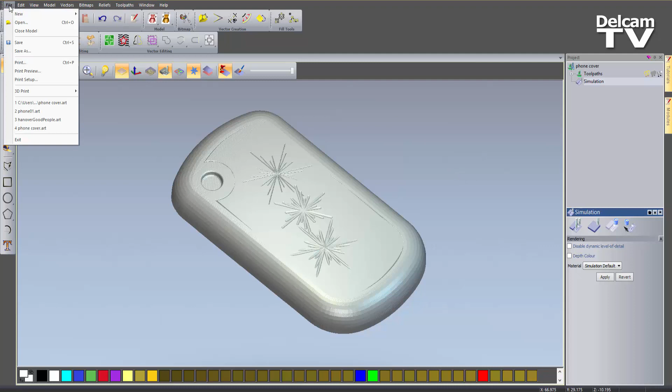Okay, so if I go to File, I'm just going to close the model. And if you take a look on the far right hand side, you can see that I actually have an installed module, and that is the Fluting module. I'll explain what that does and how you can use it to affect your carvings when I get to it. So everything you see up until that point will be just the basic version of ArtCAM Express.

Okay, so to import a 3D file, I have the back of a phone and I'm going to turn that into a more decorative sort of piece.

The first thing that you need to do is create a new model. So if we go to New Model, it asks you to set up the size for the new model. Let's do 150mm square, and leave the origin point in the middle. If you want to change that, you just select any of the corners or the center there. Then I'm going to select OK, and this will open up a new model for me.

Now, if you were to import a 3D object while still in the 2D view, you wouldn't actually see anything, and as far as you're concerned it wouldn't do anything, because you need to be in the 3D view to do this. Otherwise you just won't see it.

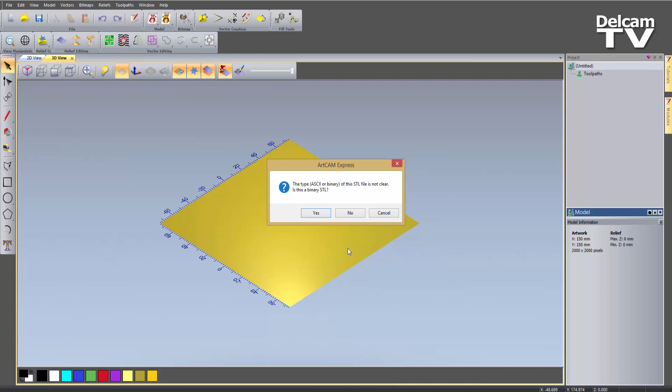Now if I open that, it's basically just giving me a message that it's not sure what type of STL file this is. I'm just going to take a guess and say that it is a binary STL. So if I select yes, it will show you this Paste 3D Model.

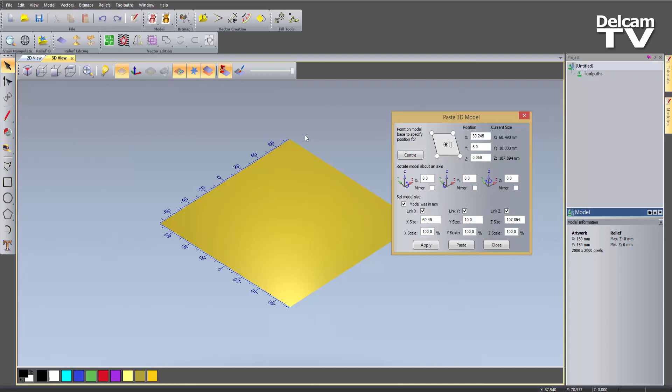Now at the moment I still can't see the phone case. That's because the origin may have been set really far away, so it's actually off the screen somewhere, or it might be underneath this zero plane and I just can't see it.

So the quickest way to actually see it is to select center, and that will center the 3D model you've just imported into the screen, or into the center of that model. So if I select that, you can see it's brought it into the center there.

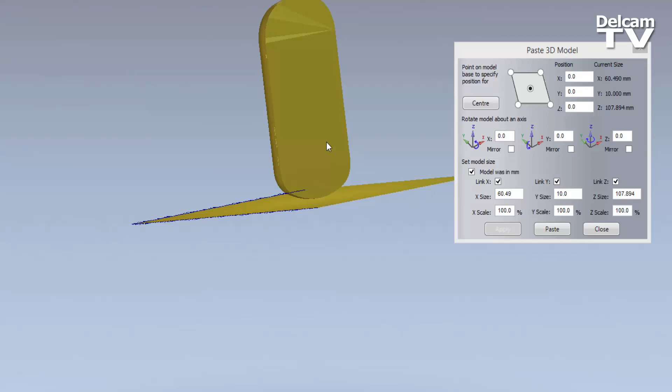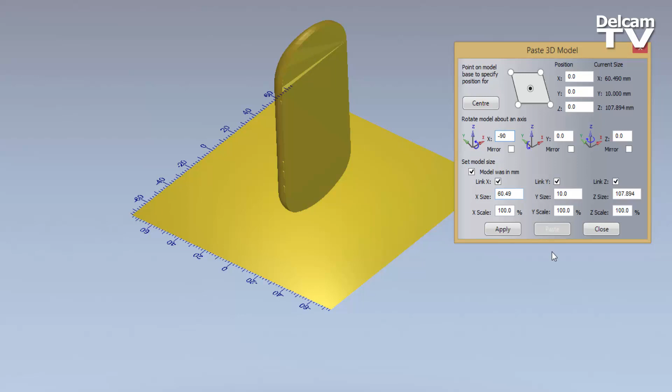Now if I just rotate this around, you can see it's obviously in the wrong orientation. So what I need to do is flip this around, in the X axis. Let's type in there, and I'm going to do this -90, so then it flips it down straight. If I type in -90 and select apply, you can see that flips it around.

Okay, now you can see it's still above the zero plane. All that I need to do is select center, and that will bring it back down. So it's brought it back down to the center of the zero plane.

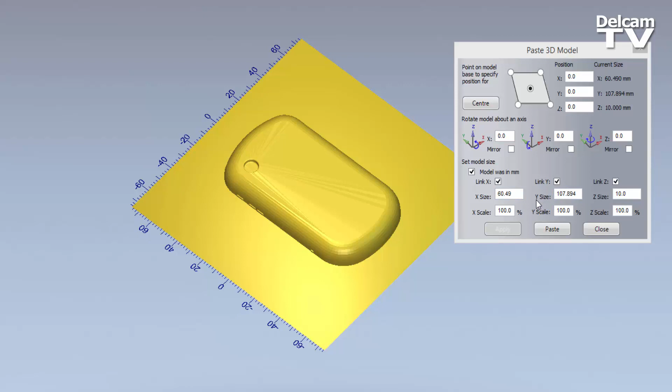Now I can see at the bottom that I've got the sizes for this piece. Let's say for instance that I wanted this to be 110 exactly in Y, but I wanted to keep the Z size set at 10.

What I need to do is just turn off Link Z, because at the moment this will scale it up uniformly. So now it's only going to scale up the Y and the X uniformly. So if I enter 110, you can see it's also changed the X.

Now this won't update until I press apply. So if I press apply, you can see it's got a little bit bigger. It's kept the Z size at 10.

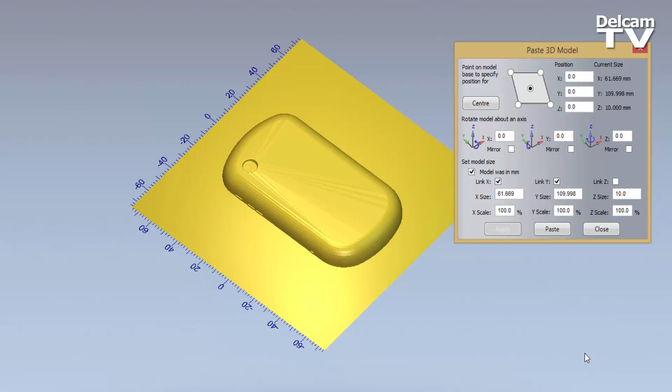So if I now paste that down - if I select close, this will just lose the model, and I would have to start again. So what I need to do is select paste, and then I can select close, and you'll see that I've got my phone case.

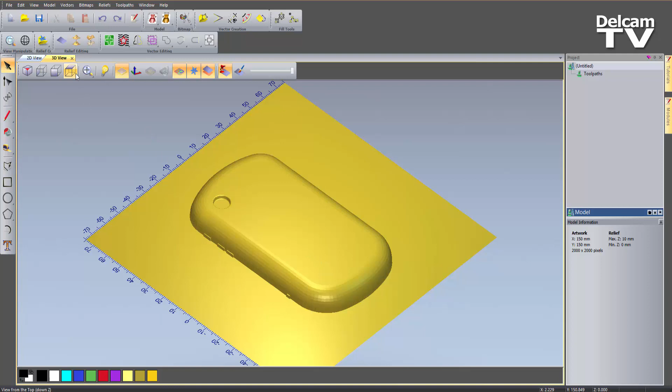Okay, so what I'm going to do now is create some vectors for the actual patterns that I'm creating. I'm going to create some fireworks on the top of this phone case. So what I'm going to do is take a view from the top, and let's create a straight line.

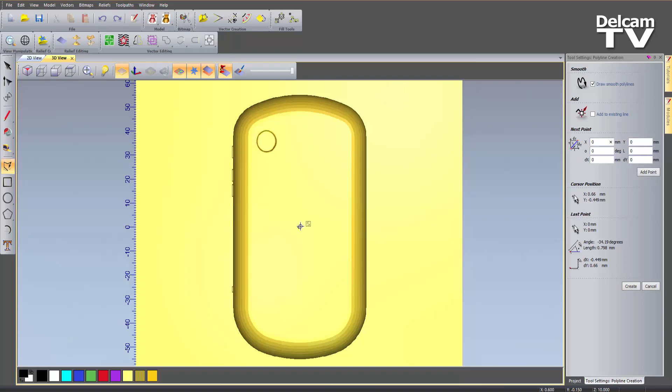You can see here that when I hover the cursor somewhere near the center, I get this round circle. This is what we call snap hints, a new feature within ArtCAM 2015 R2. It basically gives you a hint of where the nearest snap point is. It's quite useful for finding the center of things, because you would have to hover the mouse somewhere near the center and wouldn't really know where the center actually was. Now it just gives you this little hint, so you know where the center is and can just select there. I can just select there, I know that that's the center.

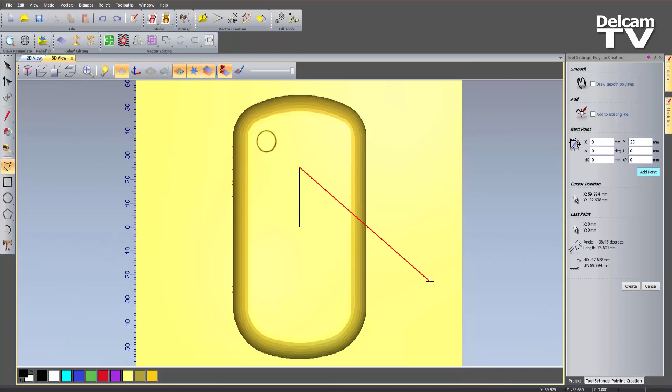I'm going to turn off draw smooth polylines, and rather than me just creating a line up here, I want this to be a specific size. So I want this to be 25 millimeters, and I can do that by just typing in on Y 25 and then just select add point, and it will basically create a line 25 millimeters.

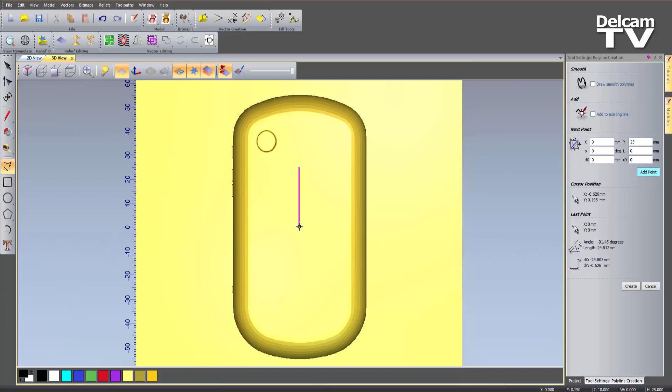Now I don't want to carry this line on. What I want to do is create a new line. A little tip, if I want the polyline tool to stay open, if I just press space on the keyboard, it will allow me to create a new line. I'm going to snap again from the center there. Let's do it, let's say about there. Press space again. Let's do that around about there.

Now you can see it's giving me all these snap hints, basically telling me where the end points and the midpoints are. Now you can see here it's getting a little bit noisy, so if you want to turn those off, all that you need to do is go down to view, snapping, and just turn off snap hints, and then you won't see them again. So let's create another one, let's say about there. Okay, so I've got my 4 lines that I have here.

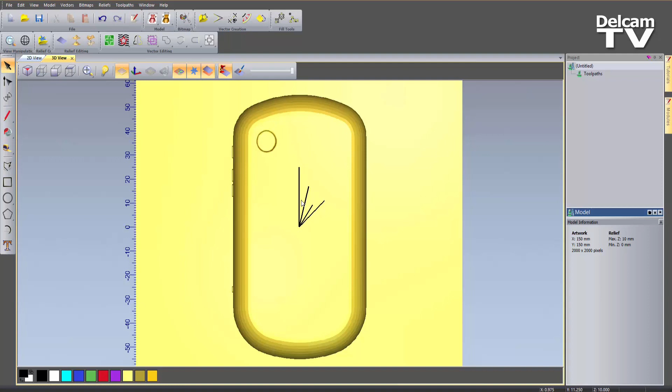Now importantly, I've done those from the center outwards. So here you can see green is the start point, the red is the end point. So all of those are like so. Now this is quite useful for the fluting, because I want them to all go in the same direction. You'll understand why when I actually get to the fluting.

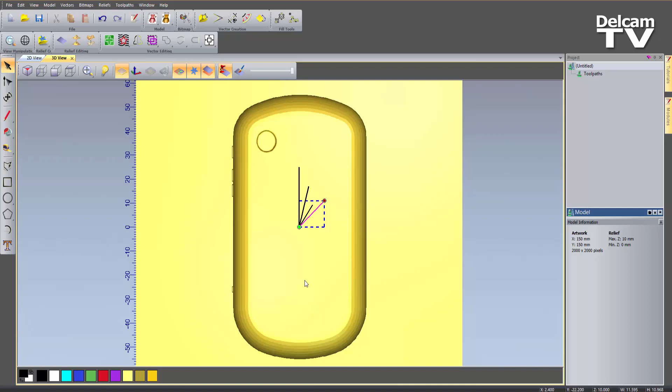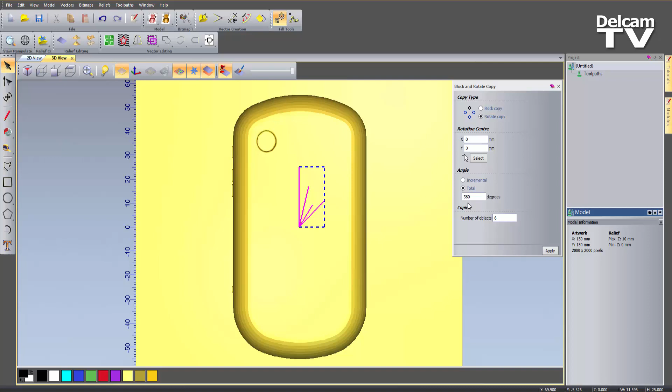Okay, so let's create a copy of all of these, and I'm going to do that by using the rotate copy. So if I select here to rotate copy, and make sure that I select rotate copy, the rotation center is 0, 0. If I didn't draw this in the center, I could just select the option here to select where I want to basically have the rotation center, and then just snap to the center there. So I'm going to do this a total of 360 degrees, and let's try 6 objects to copy. Select apply, and you can see that it's created this sort of firework effect.

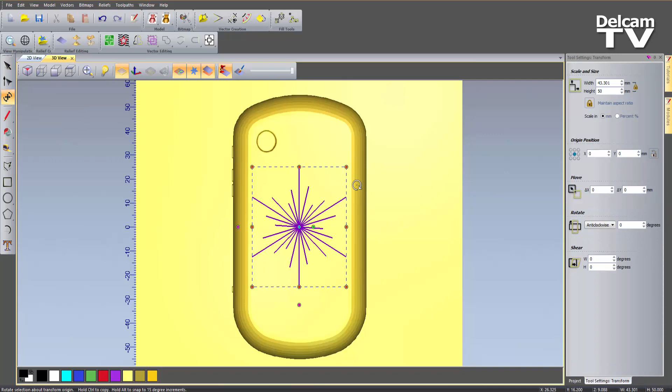Okay, so with all of these vectors selected, I'm going to group them together. You can see that they turned purple, so now I can just select one of those vectors and it selects all of them. I'm going to transform this, so I'm going to make it a little bit smaller, like so. Let's bring it down to about there, and I'm also going to select it and just move that up to the top right here.

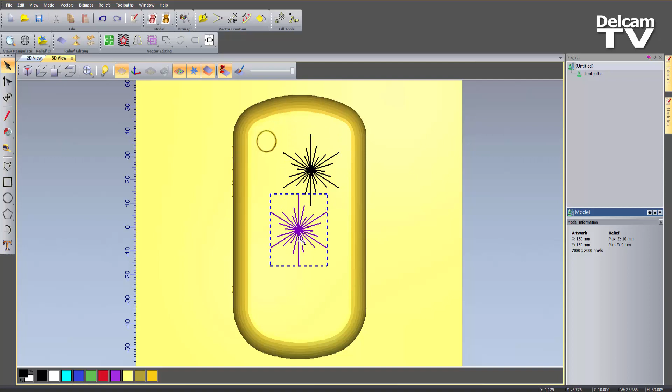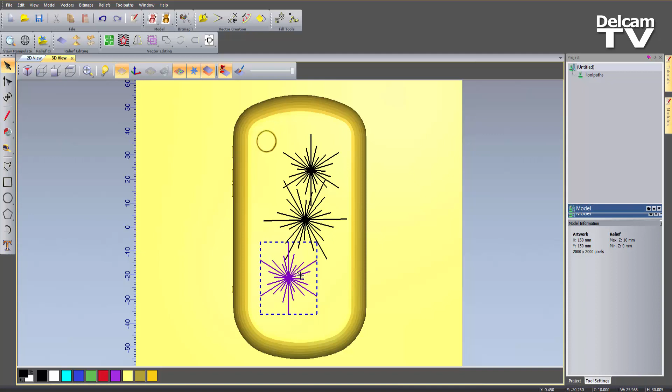Okay, I'm going to create a few more copies of this now. So let's just select that, and I'm going to press Control on the keyboard and it will create a copy. Let's transform this, make it a little bit larger, maybe rotate that around, so we've got some sort of variation. Let's put that there. And then maybe create another copy of the original, just do that down here like so. If I wanted to, I could rotate that one around, maybe there. So I've got 3 different variations of these fireworks.

Okay, so the next thing to do is to create a boundary around the actual phone. Now, if I was using ArtCAM Insignia, this would be really easy. We have a tool that is just a one-click tool, which will just create a boundary around this relief. Now, because we're using ArtCAM Express, we haven't got that luxury. So I'll show you how you can do this manually. A good thing to do is switch to the 2D view and select here to toggle the relief preview, and you can turn on the relief.

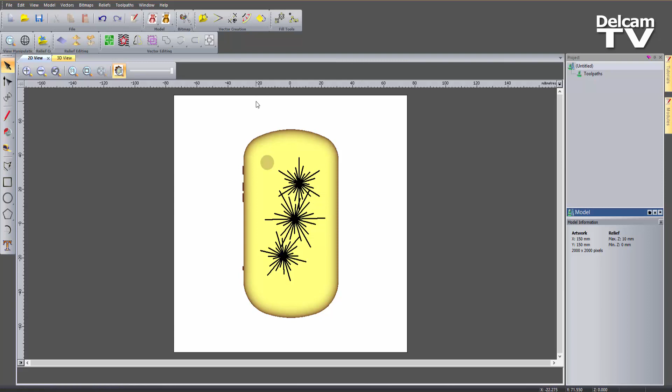It basically gives you a shaded image of the relief, and what you can do with this is adjust the transparency of it. Okay, so I'm going to zoom in here and create a line. Now I want these to be smooth polylines.

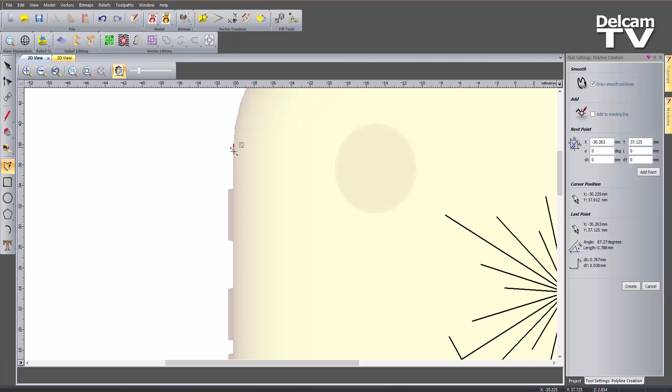Now a little tip, if you want to create a straight line and then go into curves, just create a really short line here, so it basically creates two nodes, and these nodes will lock. If I come down here, you can see I can create this straight line, and then create a short line again. This will allow me to create a curve around here. If I didn't do that, this line here would come right the way out because it would try to blend into each other.

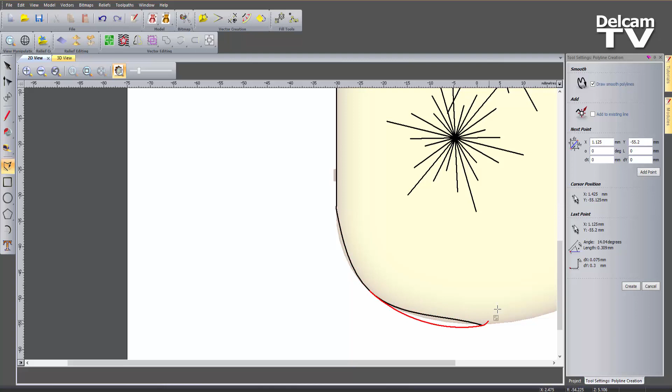So what I can do now is create a curve there, create one there, let's create one here, and then make sure that I do a small one here. If I didn't do a small one, you could see what it would actually look like. If I went to go up here, you can see that I've got this part coming out on the right hand side, and I don't really want that.

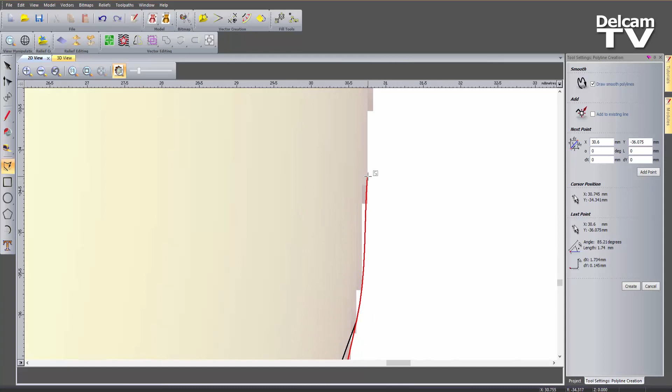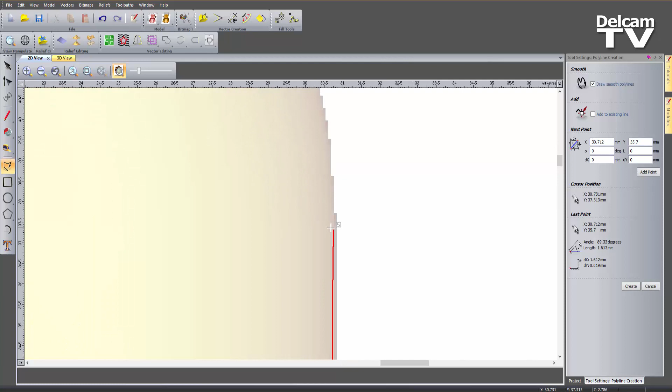I'm going to have to node edit this anyway, but might as well get it somewhere near to begin with. So let's go up to there. And you can see if I were to create that now, you can see how far it comes out. Okay, so let's just create a small node here and then follow that around. Obviously I'm doing this really quickly, and then just drawing that up there like so.

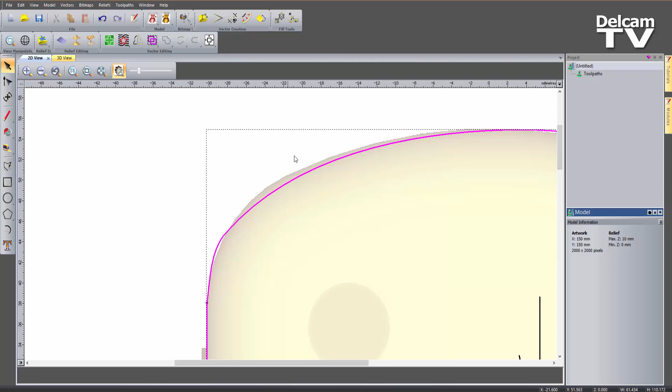Now you can see that it's not perfect - you can see that it's not basically touching here, but you can fix this really easily by node editing. So if I go into node editing, make sure that I've got the Bezier handles on, and then what I can do is just change these handles and move the nodes just so it actually looks like...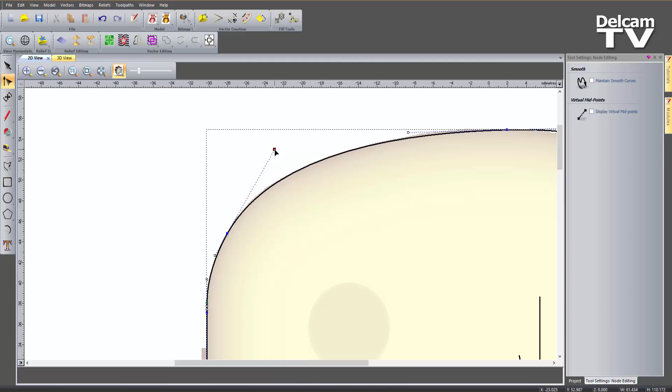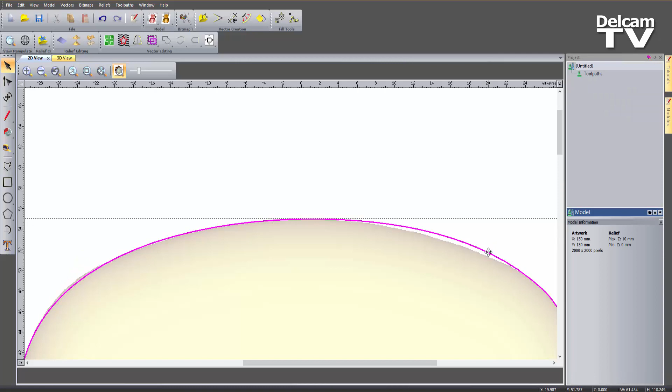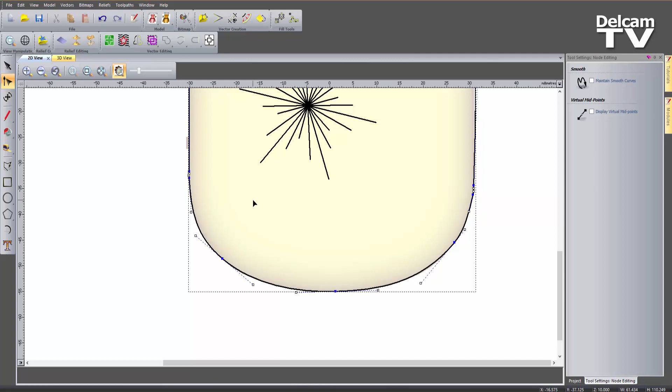...the boundary of the phone case. So just bring that out there, maybe bring that to there, bring that down. Okay, let's just do the bottom here. So let's bring that handle out there, like so. Okay, so that looks okay. So when I'm happy with that, I can close node editing, and you can see that I've got this boundary.

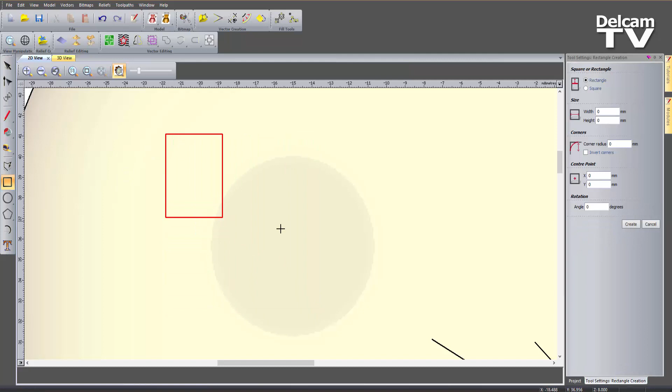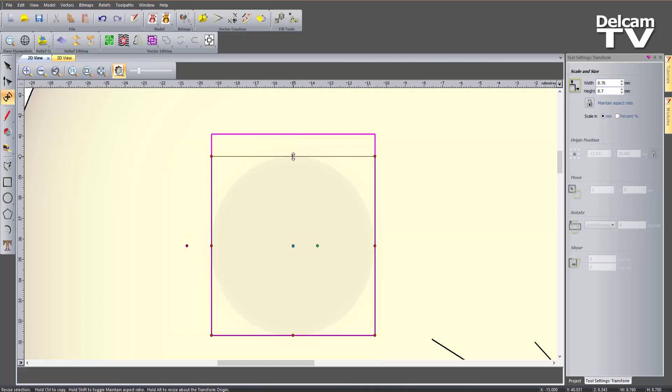Now I also want to create a circle for the hole. I can do that really easily by finding the diameter through creating a rectangle. Make sure that it's larger on one end, and then make sure that these two sides actually just touch the circle edges, like so. Then I can transform this, bring that side in so it just touches, and then bring that side down until it just touches also. So there you can see I've got this rectangle, or square, that basically touches the extremities of this circle.

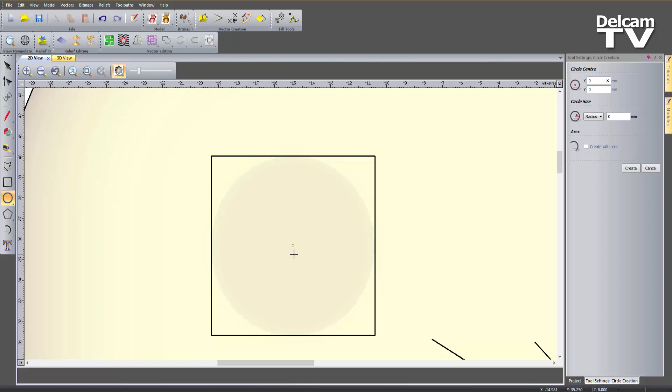Now what I can do is create a new circle, and this will allow me to create one in the center, because it will go to the center of the rectangle. Now you can see here that it's quite hard to actually find the center - I don't know where that is, so this is where the snap hints come in handy. If I turn those on, you can see it's just giving me this hint there, and I know where the center is. I'm just going to bring that out to the midpoint here. Okay, so there you can see I've created my circle, and that's the same size as the circle on the relief.

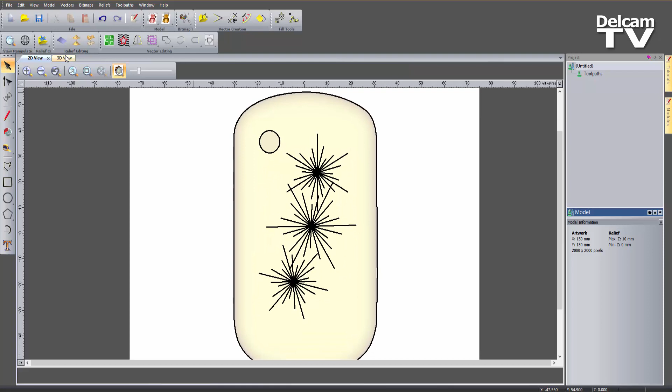Okay, so what I'm going to do now is just create a few offsets for this. Let's take a look on the 3D view to do this. So let's select to offset vectors, and I'm just going to offset the outside boundary as far as I want outside, because if I were to use this vector as the machining boundary, it would leave a little cusp on the edge for whatever ball nose tool I was using. So I need the ball nose to come over the edge.

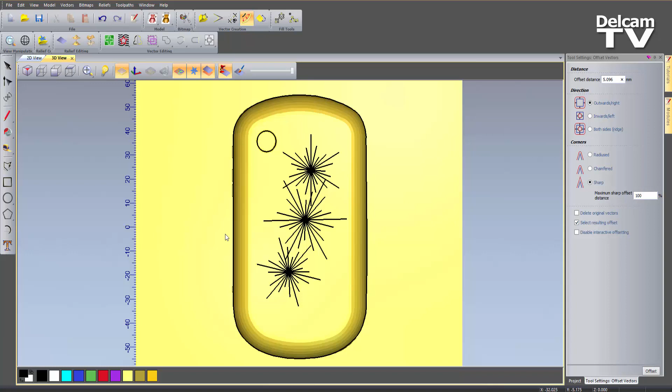Okay, so if I select that, let's bring that out, let's say about there, and then I'm going to select to create radius corners, and bring this in, let's say to about there. I'm also going to bring this circle out, and let's bring that to about there, and then I can close that. Okay, so what I'm going to do is basically trim off this area here.

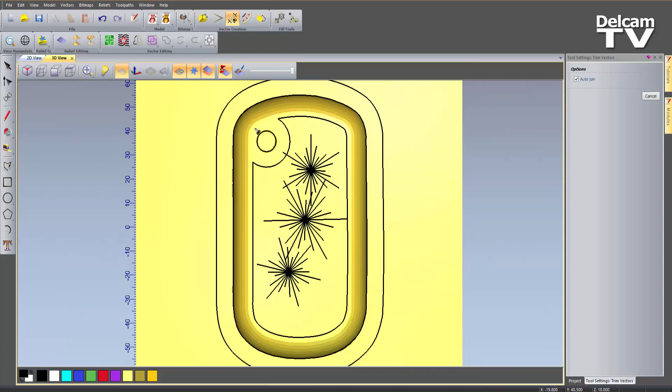Now normally you would see me using the weld vectors tool. That's not going to really work very well for this piece, because it wouldn't know what piece to keep. So what I'm going to do is use trim vectors, make sure that I've got auto join on, because I don't want to join these up afterwards, and I'm going to trim that off, and trim that off. So if I close that now and select it, you can see that it's all one piece.

And there you can see the design almost finished. There's a couple of things that I need to do, which is just to break up this border that I have here, or this edge.

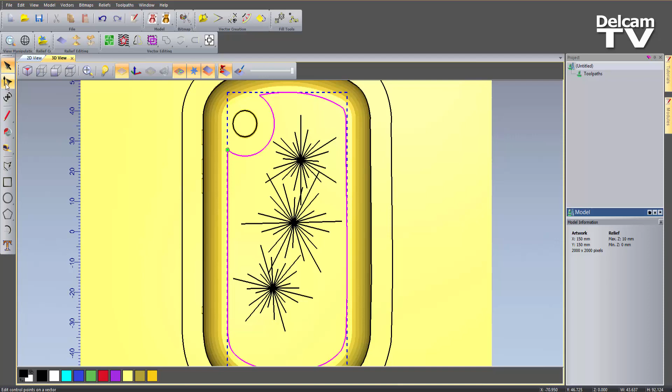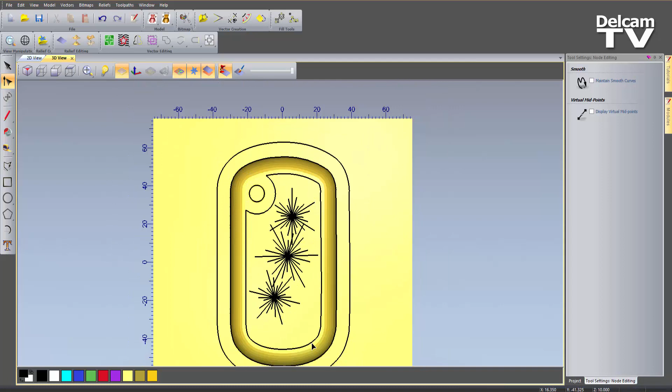What I'm going to do is go into node editing to do this. If you right click, you can see we have cut vector - the shortcut for that is C. So if I select that there and press C there, let's do the same up here somewhere, let's say there, and then let's do the same for the bottom here, about there, like so.

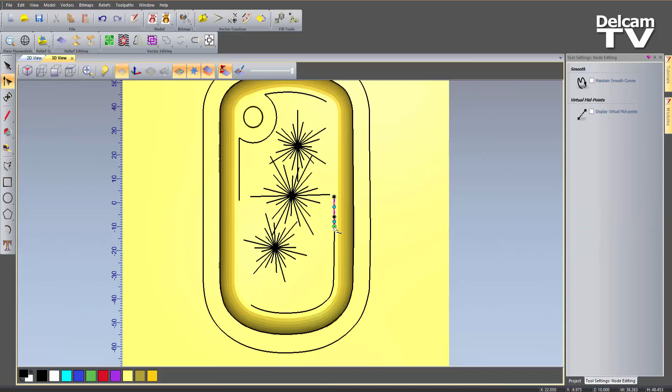And what I'm going to do is delete that piece, and I'm going to delete that piece. So I've just got these two pieces here. Now that looks probably a little bit too long, so let's just cut that vector, let's say about there, and just delete that piece.

Okay, so that looks okay. That's basically my design.

So moving on now to creating the toolpaths for this. The first thing that I'm going to do is basically machine all of the 3D piece, and I'm going to do this by using a machine relief toolpath.

So if I select toolpaths and then create machine relief - and I'm going to not do this over the whole relief, that would be a complete waste of time. I'm going to use selected vectors rather than select this vector because it would leave a little cusp on the edge.

I'm going to use this vector here, and for the finishing options, I'm going to choose quite a small tool for this, let's say a 1.5mm ball nose. For the roughing, let's use a 6mm end mill.

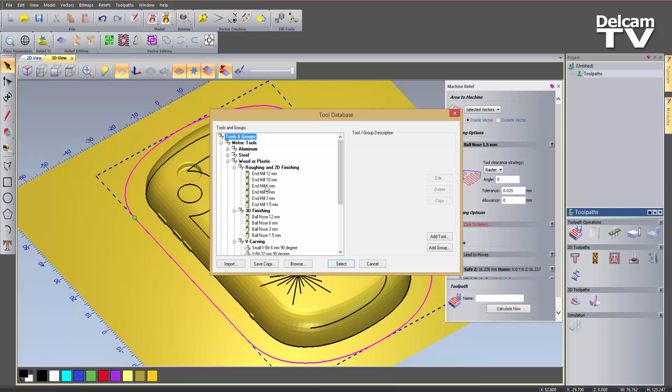And just going to use the default values for this. Let's define the material, let's make sure the Z0 is at the top there. Select OK, and then I'm going to calculate now.

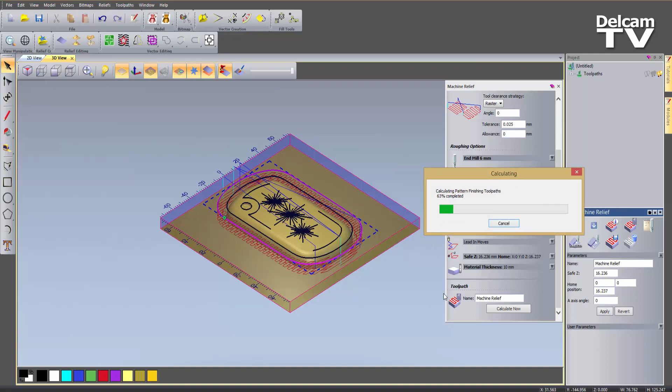So there you can see the roughing and the finishing. Now, if I open this up and then turn off the light bulb here, you can see this is basically the roughing toolpath, which is the 6mm, and then I can turn that off like so, and then that will just show the finishing toolpath.

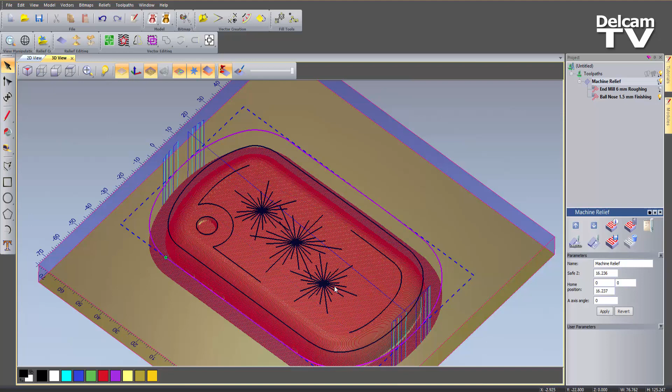Okay, so let's just turn those off for a moment. So what I'm going to do now is start machining these fireworks in the centre, these patterns that I have. Now I'm going to do the first firework, which is here.

I'm going to basically machine that using a V-bit. So I'm just going to do some basic V-bit carving, but I'm not going to use the V-bit carving tool because that requires a closed vector, and I have a group of open vectors.

So the way that you can do this is by actually using the create profile toolpath, and then just make sure that you have the profile set to along, so it follows the vectors.

Okay, now the finish depth, obviously it's not going to go 10mm. Let's try 0.25mm.

Profiling tool, let's select a V-bit. Let's choose this small V-bit that I have here. Okay, and then let's calculate now.

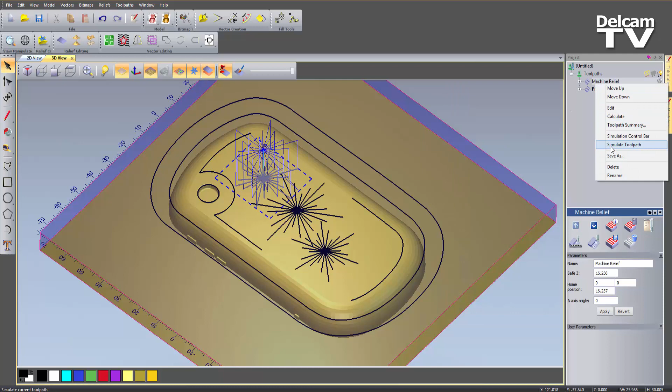So what I can do now is simulate these. So let's simulate the first machine relief. So this is basically just roughing and then finishing the part.

And then the profile, let me just rename that, just so I know what that actually is. And then let's simulate that.

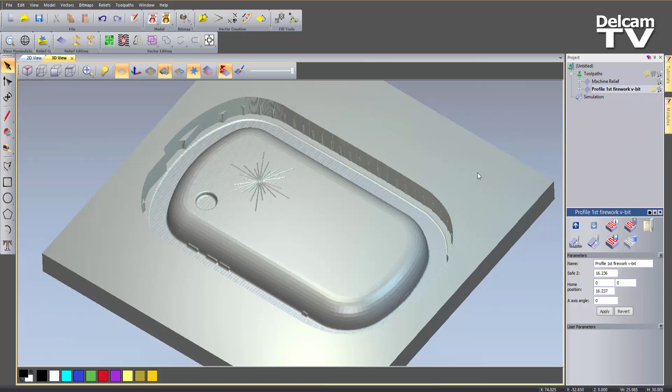And you can see that it's basically created quite a straightforward pattern. It's just followed the vectors at a depth, and then the form that it's created is just created by the actual form on the tool.

Okay, so we can do that again if we want to on this center one. Let's do exactly the same process but use a different tool so we get a different form on the actual piece. So let's do that.

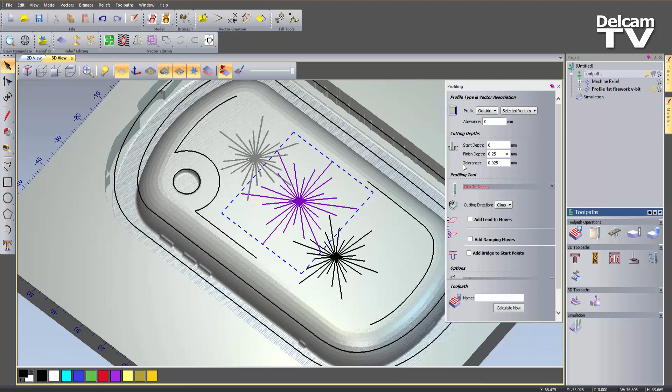0.25 profiling tool. Let's use 1.5mm ball nose again. So let's select calculate now.

Here you can see that it's giving me an error message. Now it's saying that one or more of the selected vectors overlap each other. Now what I forgot to do is to actually change where I want to basically machine this. So at the moment it's profiling on the outside, so it's giving an error message because they're basically going to all intersect.

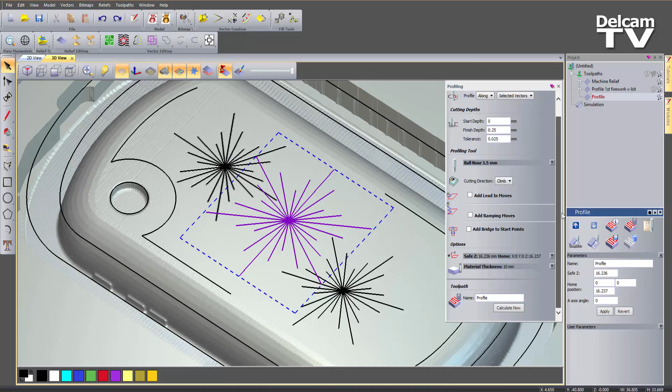So I need to change it to along and then select calculate now. So let's rename that.

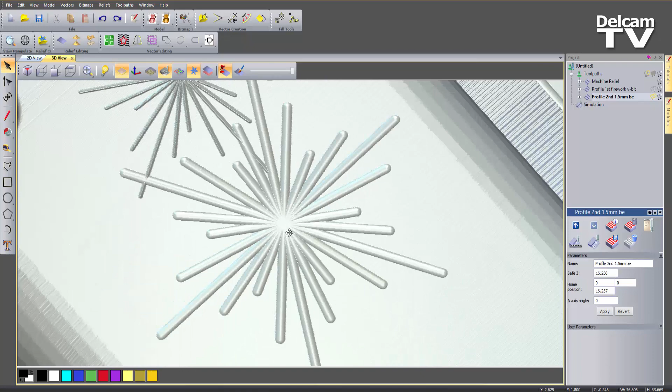Let's call that 1.5mm ball nose and then simulate that, and you can see that this gives a different type of carving. You can see that this one's quite nice. I quite like that one.

So another way you can do this is to actually use the fluting module, and this will give you really nice results because you can control the ramping, or the way that the tool goes into the material - the distance it feeds or plunges into the material. I'll show you how it works.

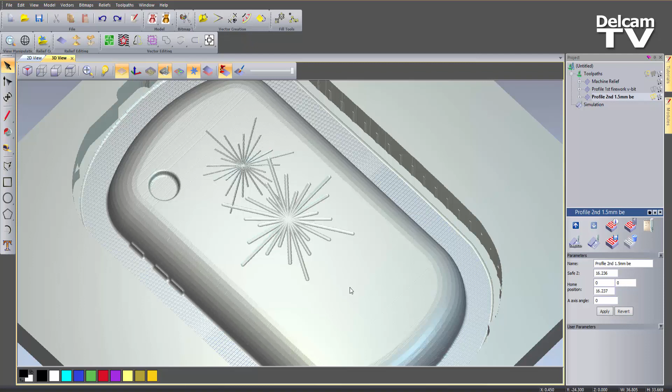So let's turn on the vectors and let's just ungroup these vectors. I'm just going to use this one vector here to show you how this actually works.

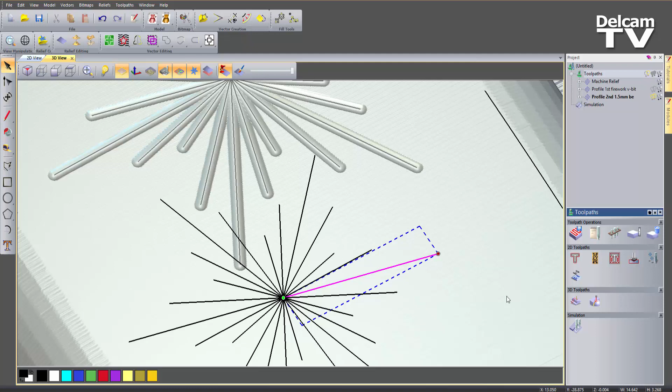So if I go to toolpaths - everything you've seen previously to this is just the basic version of ArtCAM Express, this is using the fluting module. If I go to fluting, which is here, this opens up a new toolpath, the fluting toolpath. It's pretty much the same as what you've just seen, except you can control certain aspects of it. If I zoom in here, you can see I've got this line showing which way it's going, from the start point to the end point, with an arrow showing the direction.

So let's do this the same, 0.25mm finish depth, fluting tool - let's try the same ball nose I just used so we can compare the two right next to each other. And then select.

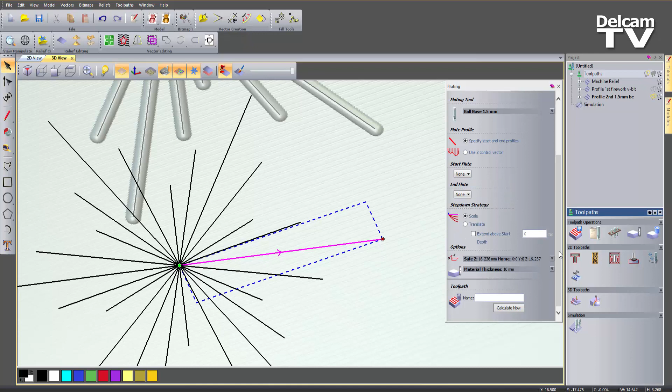So if I come down, you can see I've got start flute and end flute. I'm going to turn these off for the time being, and then select calculate. You can see it's created this straight line. Now you can see this is not close to this line - that's because the vectors are being drawn on the base plane.

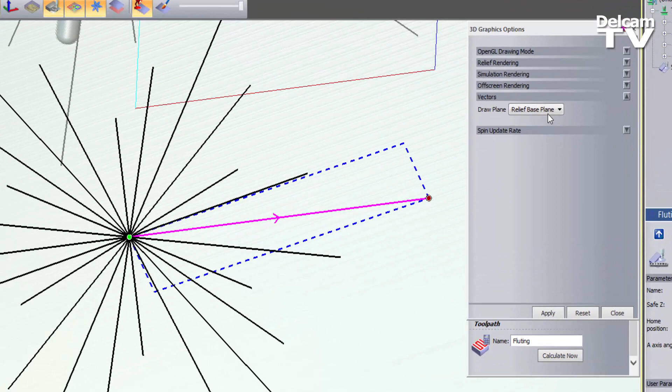And I don't really want them on the base plane, I want them on the top of the actual foam. So to make the vectors go onto the top of the foam, I go to edit, then 3D graphics options, and where it says vectors, there's draw plane, currently set to relief base plane. If I change that to top of material and apply, you can see the vectors move up to the top. Now I can zoom out and see exactly what this toolpath is doing.

Okay, so at the moment it's not actually fluting, it's just basically the same as the previous profile I'd done - it's just plunging in, going across, and then retracting out. So that's not really what I want.

So what I want to do is change the end flute, and I'm going to do this as linear, so it's just going to go straight out. Let's change it, say, 10%. So what will happen is it will plunge in, come right the way across until it gets to 90%, so there's 10% remaining, and then the tool will just come out at an angle until it hits the top. If I select calculate, let's zoom in so you can see this.

So here you can see there's 10% remaining and the tool's coming out at a straight angle until it gets to 0. I can change that, let's say 20%. You can see that's changed to 20%.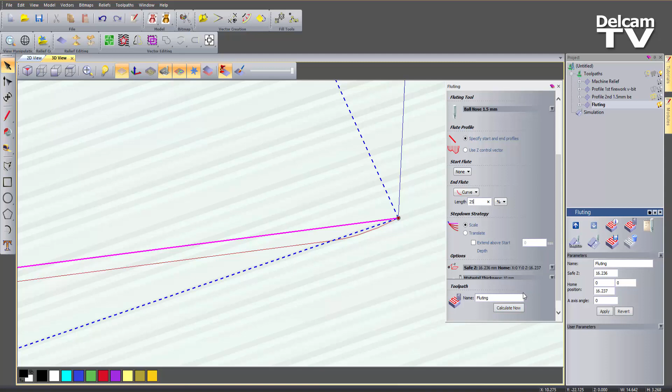You can also change it to a curve if you want to. So this curves out - it's quite good when you have short length flutes. You can see I get this nice curve as it comes out. Let's change this, let's try 25, on a curve.

And let's also add a start flute, let's do this linear, and leave this as 50%. Let's see what it looks like and calculate. So you can see that's coming down really slowly until it gets to 50%, and then that's at the full depth.

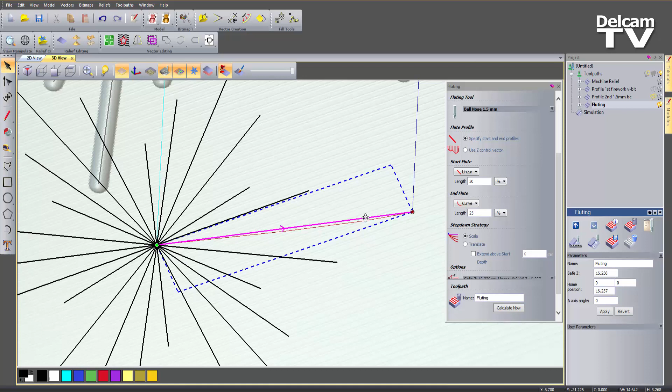And then it machines across until there's 25% left, and then it starts retracting at a curve, and comes out. Now you can see I've only done this for the one line, so what I need to do is select all of those lines and calculate now.

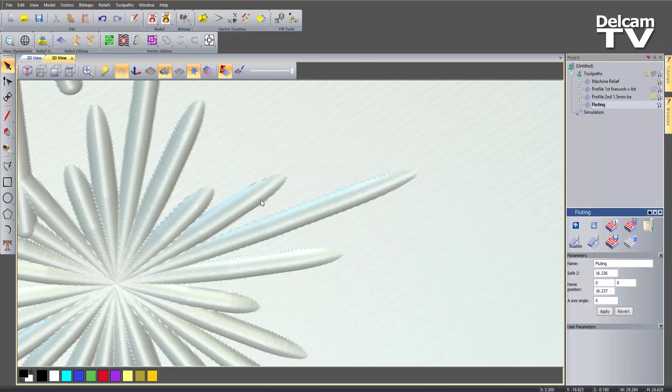So if I simulate this, let's close that and simulate this one toolpath - you can see I get this sort of effect, and it's quite nice. What's happening is it's slowly coming down to the depth, and because it's gradually coming out, I get this nice edge rather than just a round edge.

So that's how you use the fluting toolpath, and you can see that's a really, really nice carving compared to the other two carvings, which are okay - it's just that they're really basic. With this one, you can do some really nice effects.

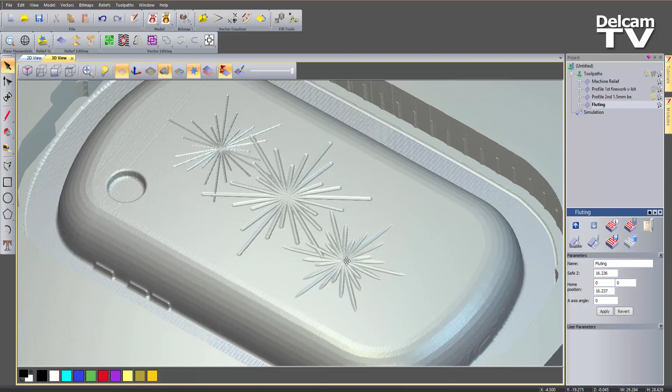Okay, so finally what I'm going to do is cut the part out. I'm also going to take a look at this. You can see here that I've got this radius in the corner of this circle here. I don't really want that.

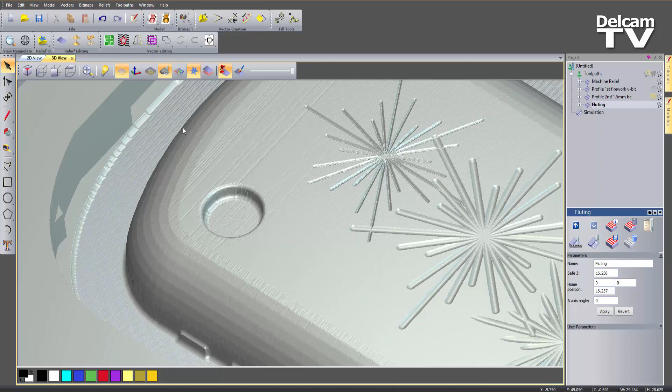Let's take that out. So let's turn on the vectors and select that vector there. Now if you take a look at the bottom right hand corner, you can see I have a Z minus value, set to -2, that's the depth of this.

So let's create just a profile. I don't need to do an area clearance for this because all of it's already machined out the way. So let's create a profile, going to do that along the inside.

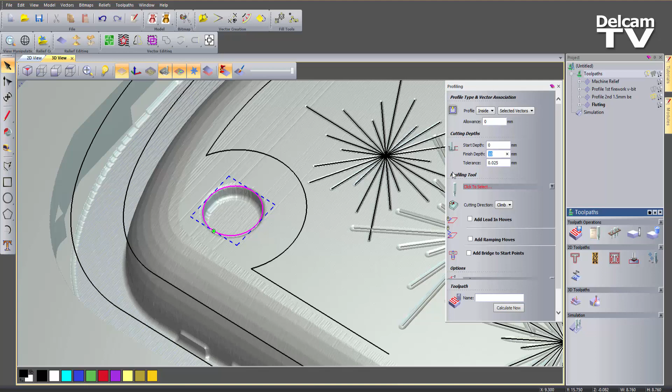Finish depth, definitely not 10mm, it's 2mm. Let's select a profiling tool.

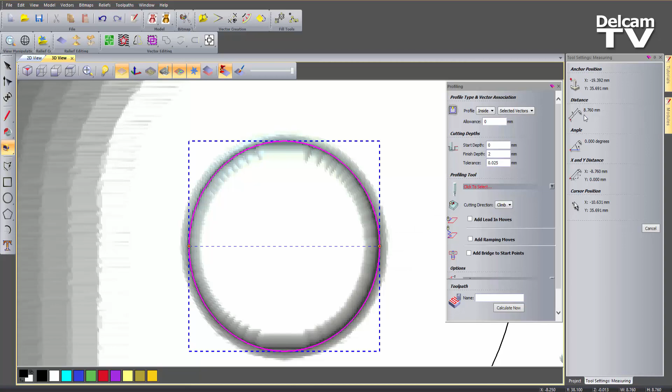Now I'm not too sure how big this hole actually is, so what I'm going to do is just cancel that a second. Let's just zoom in, I'm just going to measure this quickly. So it's 8.76, so I'll be able to get in there with quite a large tool.

Let's close the measure tool, select profiling tool, let's use a 6mm end mill, and then calculate now.

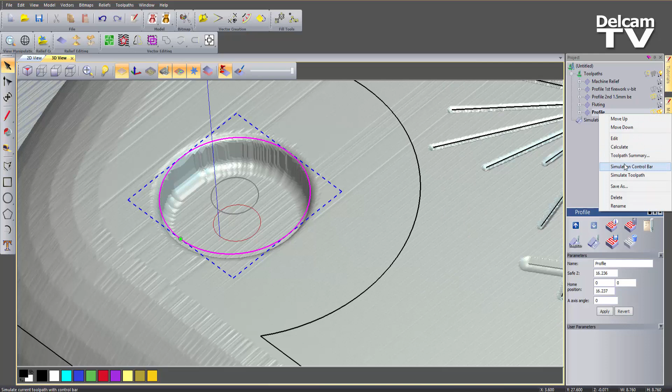Okay, so that's just basically gone around at the depth. So if I simulate that, you can see that it's just took that radius out of there, which is something that I didn't really want.

So let's select the original boundary for this and let's create a new profile. The finished depth is 10mm, so it's going to cut the part out.

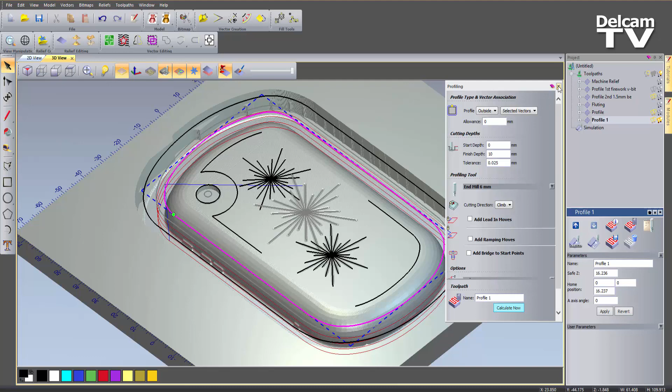Profiling tool, let's use the 6mm. Select create, and then I can simulate that and it's cut the part out.

What I need to do is just delete the waste material. So what I'm going to do with this is keep picked material, and I'm going to pick that material.

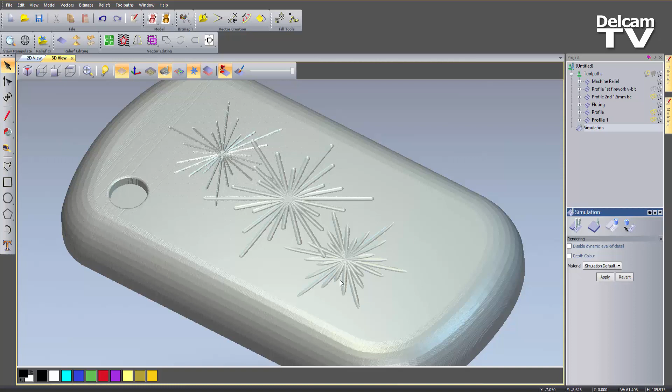And there you can see my phone case that I've imported in, and I've created all of this carving on there.

Right, so let's just change the names of these, just so I know what's what when I create the G code for this.

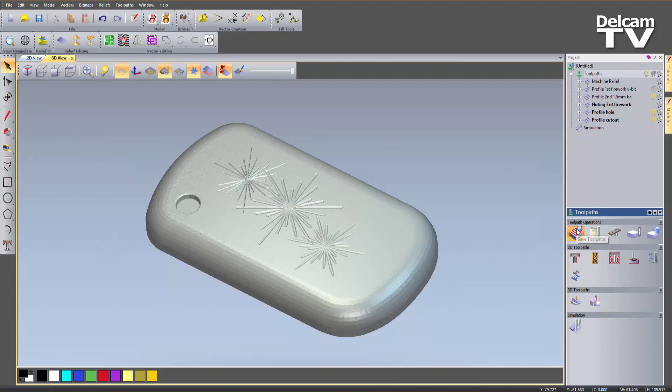Okay, so when I want to save this to send to my CNC machine, if I select toolpaths, and then I can select to save toolpaths, you can see here all of my toolpaths. Okay, so let's save the toolpaths to separate files.

So if you've got a single headed machine, this would be what you would do. You would save them all to separate files and then send them to your machine separately. You can also append the toolpath details to the file names, so it basically adds all of this information into the file name so I can see what it is.

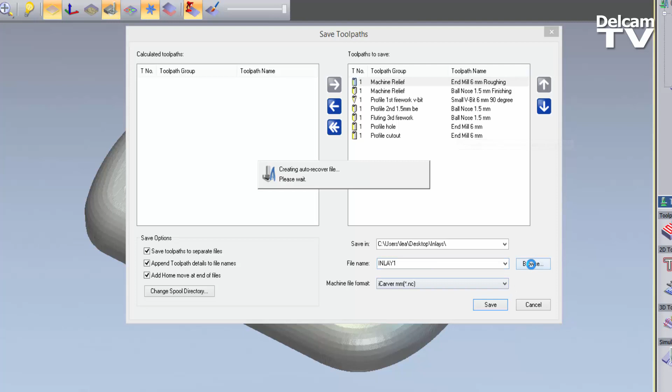Let's click to browse, and I'm going to go onto my desktop. Let's find my folder, let's call this, let's say, carving fireworks. Click open, and the machine file format, this is probably the most important part of this dialog box.

If I select that, you can see that we have all of these different machines. Now these are what we call post processors, and they're basically a converter that converts all of the toolpath information from ArtCAM into a code that your CNC will understand, and it will basically make your machine move and cut this part. Okay, so we have well over 200 post processors available within all of the versions of ArtCAM.

Now, if you're not sure whether your machine is listed on here, I strongly recommend that you download the demo or the trial version, go through the tutorials, and then at the end of that you'll see whether your machine is on there, and you can try different post processors, see if they work on your machine. Just make sure that it's working okay before you actually purchase ArtCAM.

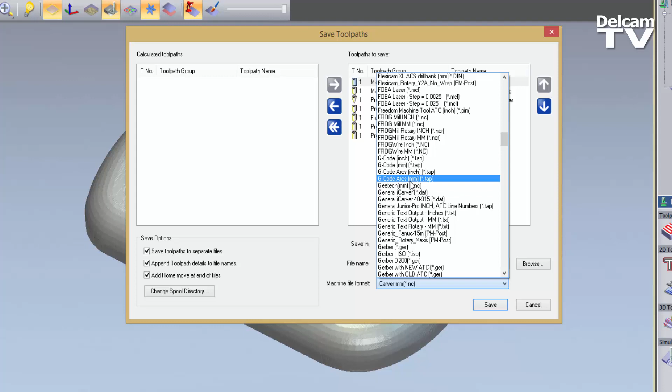So I'm just going to use a generic G-code post here. Click save. Let's open up my folder, and you can see that I've got all of these files here. Now these are just basically text.

So if I were to select, let's say, the profile for the hole, open that up, you can see that it's just a basic text document, and it's just telling the CNC what to actually do, how to machine it.